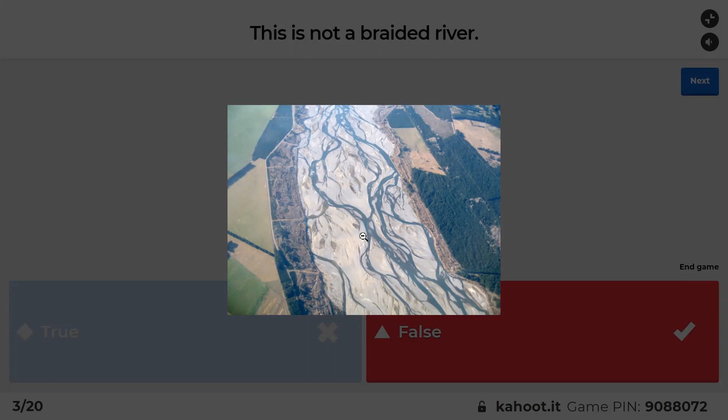This is not a braided river. So do you know the braided river? You see so many parts of the river deviating from the main stream, so it's called a braided river. It can be maybe 10% meandering, but in the previous question, the best answer should be A. So if you have a question, just stop me.

Interesting, be careful about the 'not'. The value of kinematic viscosity for water - is it 10 to -7, -5, -3, or -6?

Do you have any question? Yeah, you see the correct answer here.

So double points - does vegetation not increase erosion? Maybe it slows the flow and resists sediment, so it makes sense.

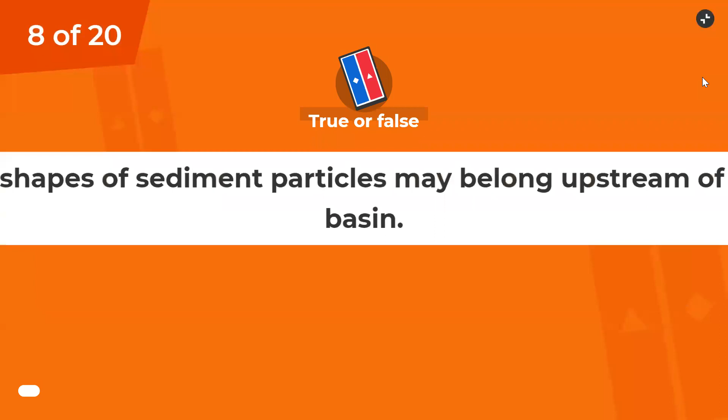If you have any question, just ask me. True or false, double point. So we have some shapes of sediments here - do they belong to upstream or downstream? Imagine we have a river reach.

It may be for upstream or maybe for downstream of a river basin or river reach. Look at the corners of the sediment particles, or the shape of it.

Good, yeah, because you can see the sediment particle has some corners - you can see they don't face erosion. So they should be from upstream of a river reach, because as they move down the river, they collide with each other and erode, and the shape will become completely circular or a sphere.

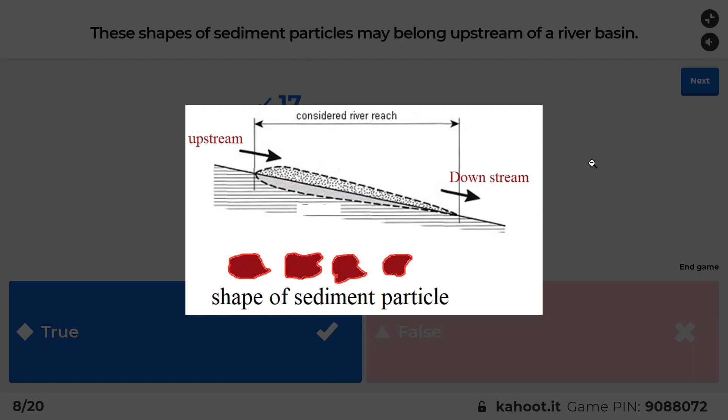No, we need it during the course today. Why? Yeah, it's so easy, but R is A over P. Yeah, and Y relative to B is so small, so it should be Y.

Yeah, it's not working here. Okay, I will explain this.

The meaning of aggradation - Ninja? Aggradation.

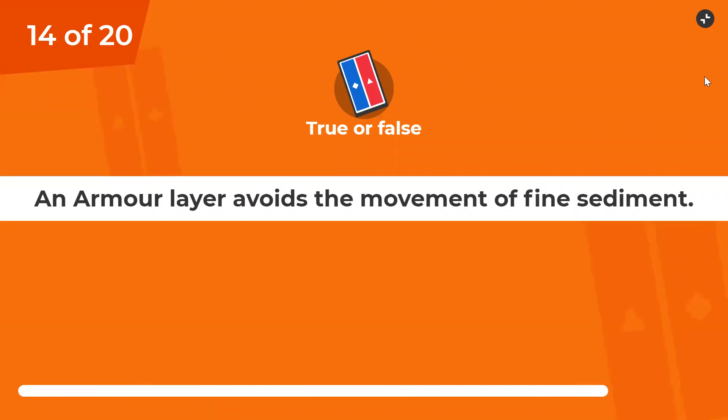Armor layer, you have it in previous lecture. Good. Yes, armor layer, there is like armor which defends from the fine sediments and avoids erosion. I will show you more pictures.

Yes, there is an armor layer in this picture. For example, here you can see there are so many coarse material or coarse gravel, and also here. So these avoid erosion of fine material behind them.

Where is Kamal? Are you going?

True or false, double point. Rouse number. You can anticipate both bed load and wash load with the Rouse number. Yes, if you remember the graph, you can estimate both.

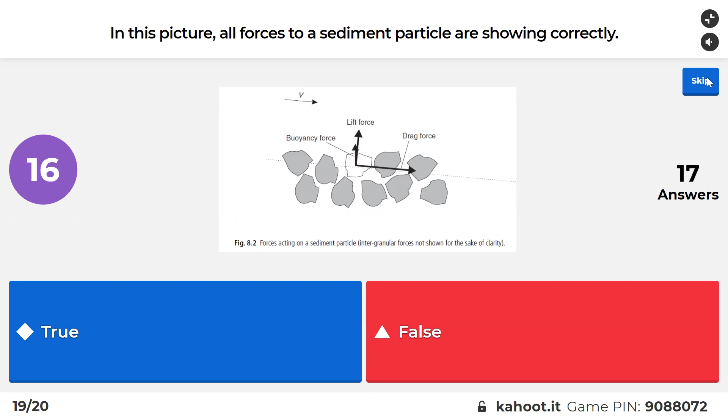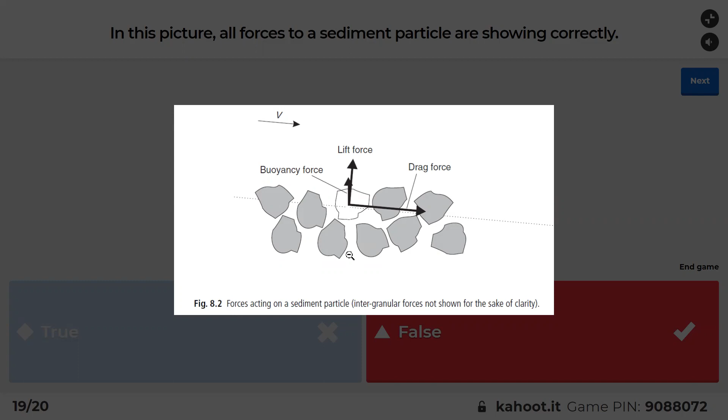So it's false, you cannot see all forces in this picture. Which force is missing? Yeah, the weight of a particle, gravity. So we have another force downward here, which is so important.

Last question. You are so near to each other. So it's the Shields parameter, and tau star C is the critical value. Yeah, 13 is good.

So when your shear stress is more than critical, you have movement. If not, you don't have movement.

Yeah. It's not so bad, yeah, but everyone is near to each other. Good. Who is Yi Yang? Yeah, and Saroj? Yeah, and Sujit. You have to be better.

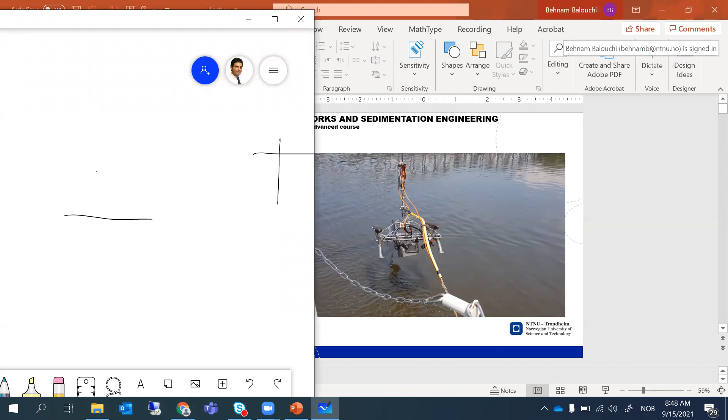Yeah, we have a problem here. So I need to restart this, but it is better to do it later. Yeah, it's not working.

Okay, let's go through this and then I will explain it later for you. I want to tell you a story of sediment transport, both bed load and suspended load, but the tablet is not working and I have to restart it. So I'll go through the slides and then come back and give you some information.

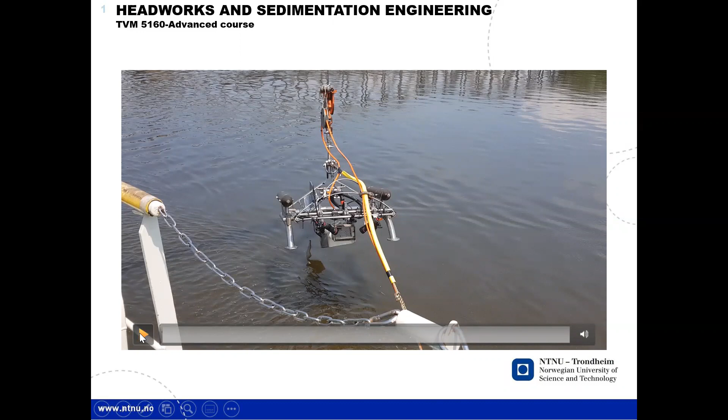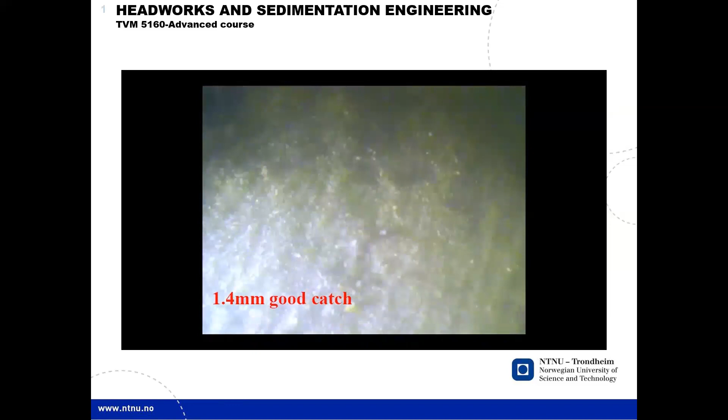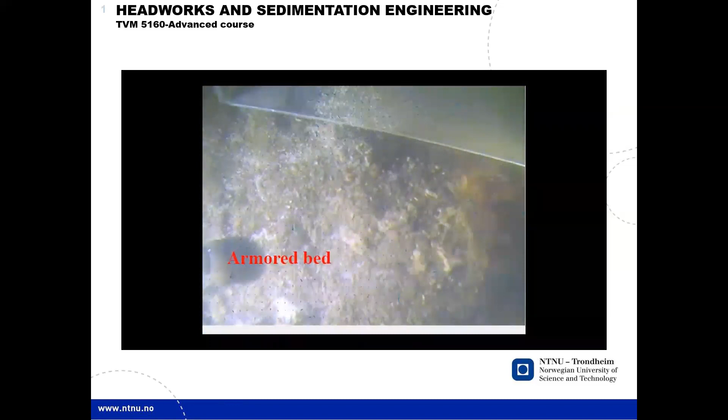So here you can see bed sampling. This is a sample and you can see how to trap the sediment particles there. Sometimes it's good for sampling, sometimes not, and you can see the movement of sediments. So here it's good catching the sediment, we have debris or obstacles in front of the sampler. And here you see an armor bed, so we don't have any sediments going to the sampler.

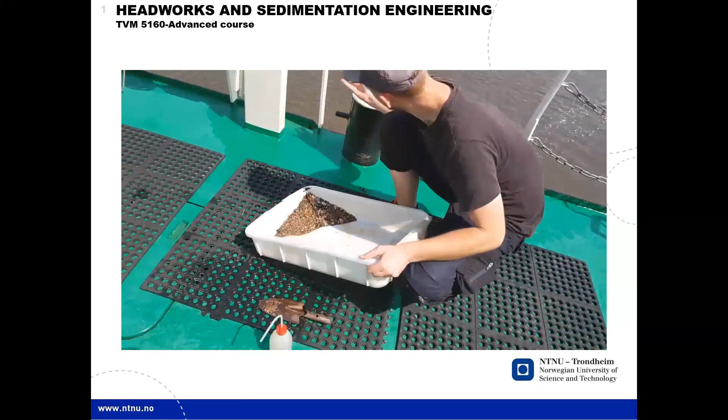You can see a scour, and while you see the scouring, look at the movement of sediments. And here is the bed sample that you can see, these are uniform sediments.

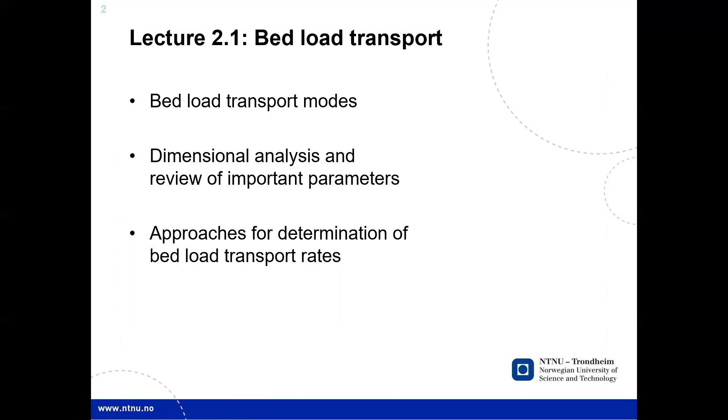So we are going through bed load transport modes, dimensional analysis, and review of important parameters and approach for determination of bed load transport rate.

So let's start with the way of moving sediment. The term bed load defines all particles which are transported along the riverbed in a rolling, a sliding, and saltating manner. You can see here rolling, sliding, it just goes straight, saltating or jumping. I will explain them after the rest because I need the tablet.

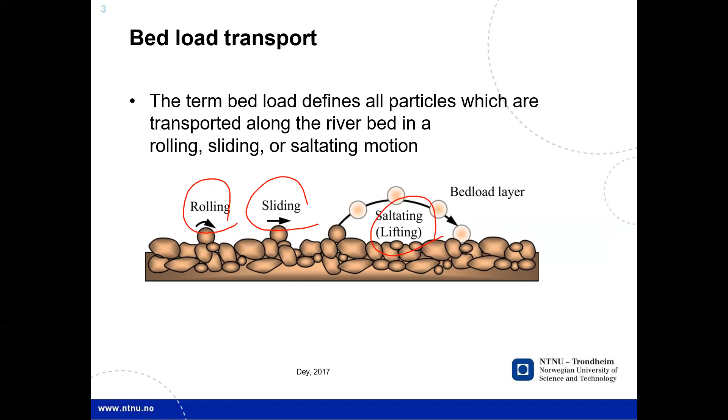So according to this definition or assumption, each researcher chose one assumption. One of them chose that the sediment moves based on rolling. One of them chose that sediment moves based on sliding or saltating. And then they provided some equations and some research. But the main point, like previous equations or previous parameters you want to consider, you need a dimensional analysis.

You may remember the dimensional analysis methods such as the Buckingham Pi theorem. You may remember that.

Then we want to evaluate the sediment transport. We define it as GS, and you can see the dimension or unit of that, kilogram per second. And if you want to consider it, for example, per 1 meter, it should be kilogram per meter multiplied by second.

So it depends on some parameters that you can see here. For example, the parameters of fluid properties, it's the fluid density and kinematic viscosity. For the sediment properties, it's density of sediment, rho S means sediment, D is grain diameter or sediment particle diameter.

Channel, so we use the water depth of channel and the shear velocity of the channel. And kinematic parameter, G, which is 9.8, the gravitational acceleration. In various references, you can see we have 8 parameters, in some 7. So you know from the dimensional methods that we can convert these parameters to each other. So here we consider 8 parameters.

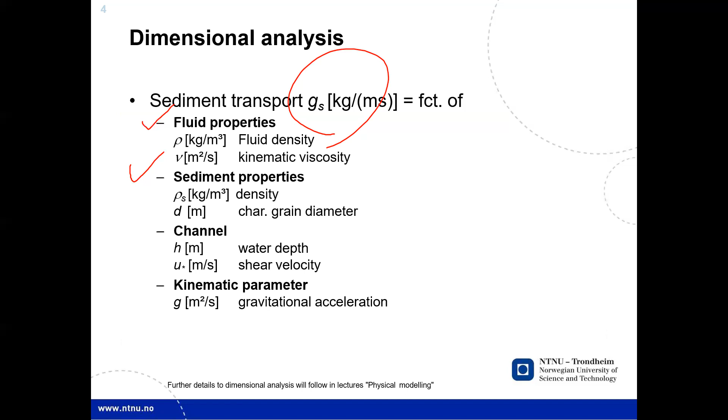And you know from Buckingham Pi theorem that we have 3 main dimensions, such as length, mass, and time. So meter, kilogram, and second. And we have 8 parameters. So our dimensionless parameters should be 8 minus 3, which gives 5 parameters. Okay, if you have any question, ask me.

The other one is Shields number, which you have seen in a previous section. It's tau 0 over rho S minus rho multiplied by G and D. And the other one is the density term, so rho prime - it's important that rho prime is dimensionless. So it's rho S minus rho divided by rho. And the other one is relative submergence, the water depth over D.

And if I want to remind you about laminar flow versus turbulent flow - you can see it's laminar flow and the streamlines are straight, then we increase the velocity or increase the discharge, you can see turbulence in the streamlines, and it's not a straight line. So this is turbulent flow, and it occurs mostly at high velocity and high discharge.

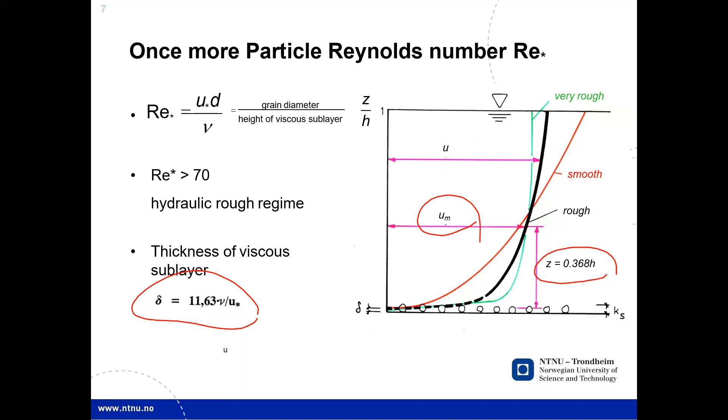Particle Reynolds number can be combined with Shields stress, resulting in a new parameter. Some researchers developed or introduced a new parameter, mostly for rough regimes, called D star, named the sedimentological grain diameter.

The definition is this equation: Reynolds star to the power 2, over the Shields parameter, and the power is 1/3. If you insert this value, you have this parameter.

After introducing D star, they introduced some figures, and by those figures you can determine which regime and which flow kind you have. It's another representation of the Shields diagram.

For a predefined material with given D and density, D star depends only on the kinematic viscosity, which itself depends on temperature. So somehow it depends on temperature. But the influence of viscosity is generally negligible for Reynolds star more than 70. If you remember the graph, in the turbulence regime it's not important.

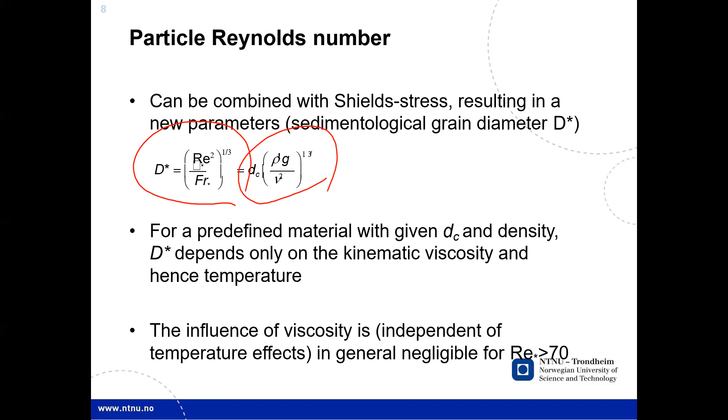Further parameters you should know: the shear stress is gamma R S, or if you insert gamma, you have rho g h S. This is for a wide channel.

Maybe that's your question, Mona - it's in the Kahoot test. R for a wide rectangular river is Y.

Shear velocity is given by this equation, tau 0 over rho, and critical Shields stress is this important equation, which we mostly compute as this value, 0.047.

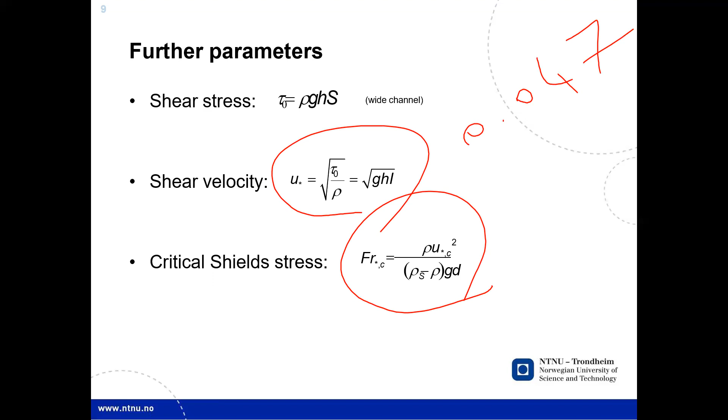Other important parameters we face in this course: the absolute bed shear stress, tau 0, meaning gamma R S, and tau star, which is the equation I showed you: tau 0 over (rho S minus rho) multiplied by G D.

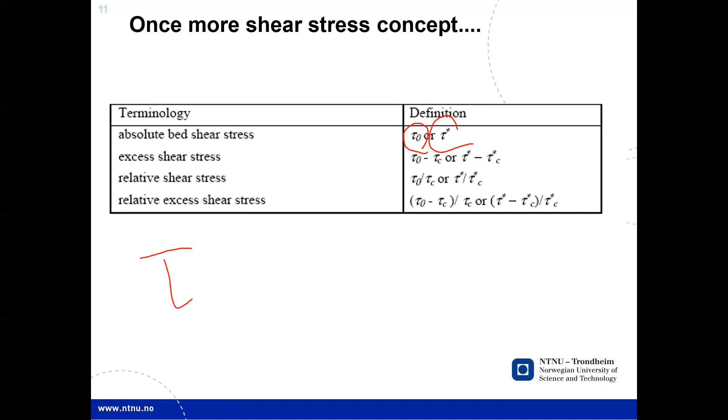Remember this question from the Kahoot test - if we have this condition, what happens? Kamal, are you here? So if we have this condition, what happens - do we have movement or not?

Everyone think about it. Our shear stress is less than the critical one, so we don't have any movement because the critical one is more. The difference, tau 0 minus tau c, you can see here - it's called excess shear stress, and I think it's an easy definition you can understand.

Relative shear stress is a way to make shear stress dimensionless - we divide tau 0 by tau c, or the other parameters. Relative excess shear stress is similar, and you can see the equations here. In your examples or other problems, if they ask for excess shear stress, you compute this parameter; if they ask for relative excess shear stress, you compute this other one.

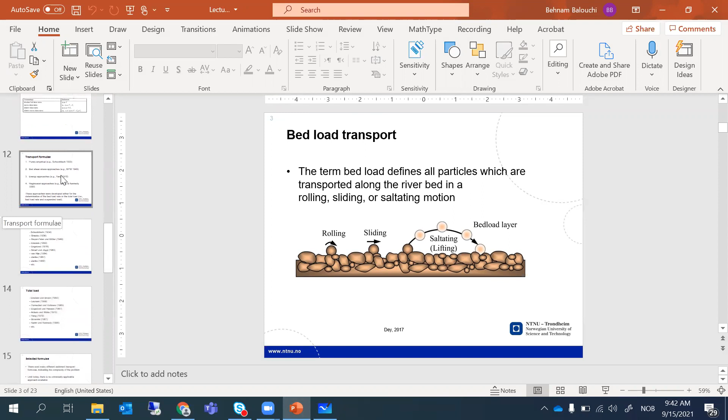So do you have any questions? Okay, just go to the PowerPoint. I think we are here.

So as I said, we have some methods for transport of sediment, or transport formulas. One of them is based on empirical methods, for example Schoklitsch, 1933. The other is related to the bed shear stress approach. Another uses an energy approach, for example by writing the energy equation in differential form, they extract or find an equation for computing the sediment load. Yang is also famous - he has a really good book that you can study. And some of them use regression approaches, as I told you, using experimental data and dimensionless analysis, they extract an equation.

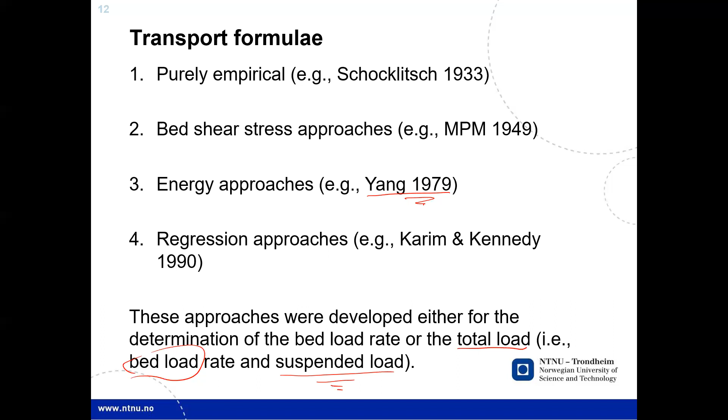These approaches were developed either for the determination of the bed load rate or the total load. It's important to know that total load is the bed load plus suspended load. Some equations estimate total load, some estimate bed load, and some estimate suspended load, so you should be careful about using them. If they ask you for the total load, use the equation that gives total load, or if you use separate equations, just add bed load to suspended load.

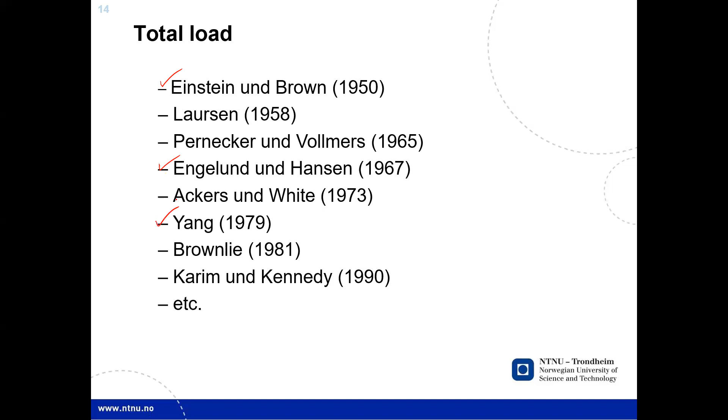There exist many different sediment transport formulas, indicating the complexity of the problem, and as I said, until today there is no universally applicable approach for them. But as an example, we are going to explain briefly the Shields method and Meyer-Peter and Müller.

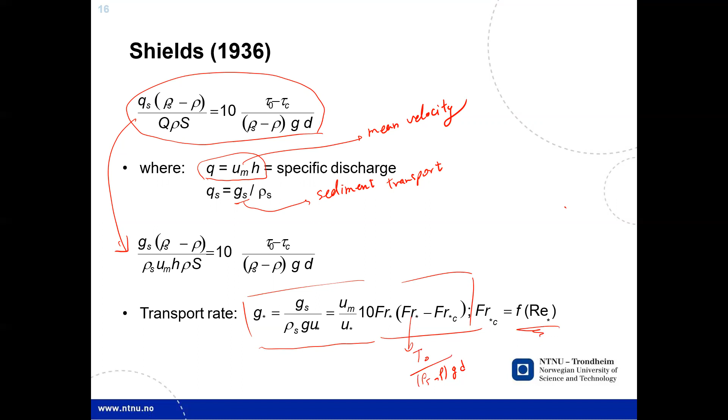If you remember, this is the Shields parameter—I introduced these parameters before. You know that the Shields number is related to the particle Reynolds number. So you have some examples to solve; you just need to use this equation and, for example, find tau zero using gamma, R, S, put the data in it, and solve it. I think it's not difficult, but next session you can ask about this if you have any problem.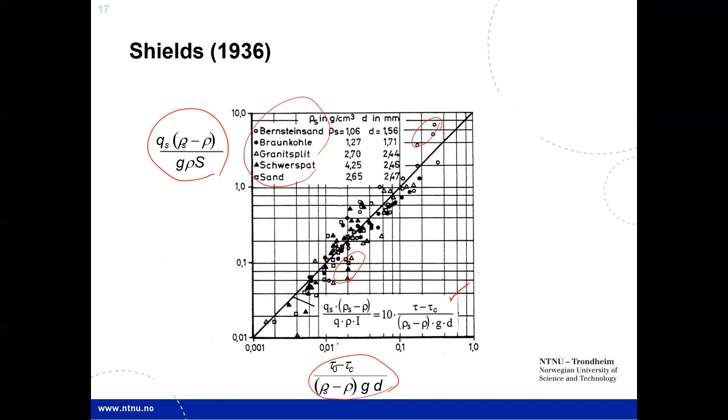Shields stress, that you know. Critical Shields stress, that usually we consider. For example, Einstein has another value close to that, but this is the most important value for the critical Shields stress—this is tau C, and this is the formula for that.

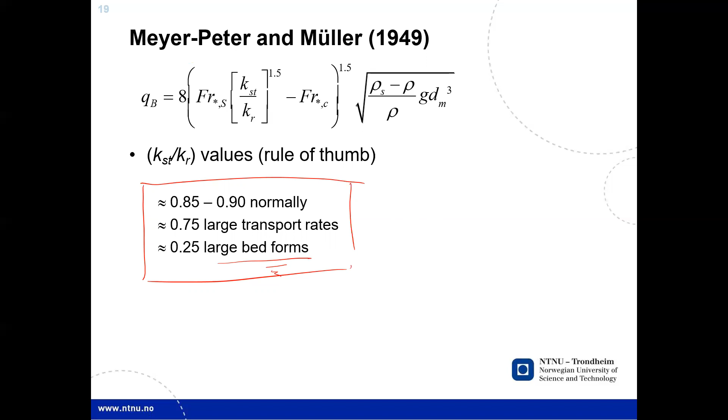So you should make a graph—you remember, you have a graph of sediment, where this is 100% and this is D. You have these values, the accumulation probability. For example, here is 60%, this is P. For example, here you have D1 and this is P1. If you remember the grain size distribution graphs, you can see this—I think you have it in the first lectures.

You just need to remember, I think you have it in previous lectures, how to distinguish between uniform sediment and non-uniform sediment. So that graph is something like this.

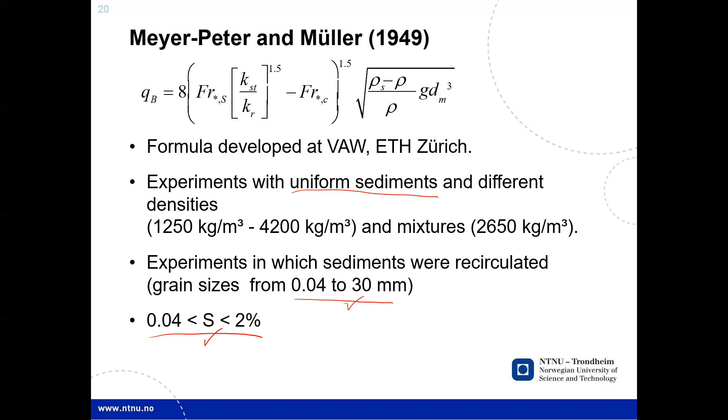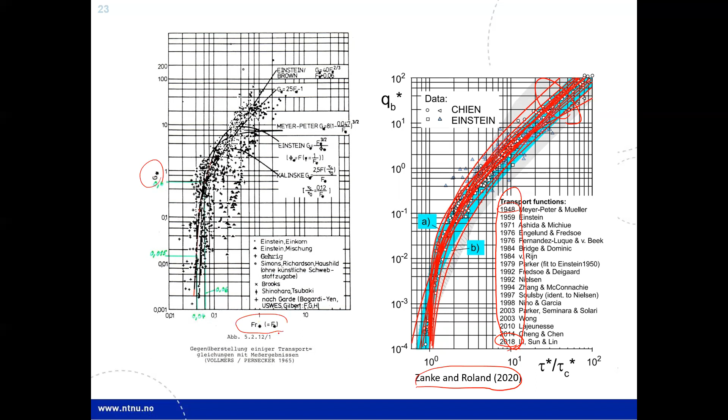Here you can also compute G star based on the Shields number, for various equations or methods like Meyer-Peter. You can see each one is different; for example, this is as this curve, this is as this curve. If you want to use this curve, it's just a graphical method, and it's not always useful, but it's good to see it.

For example, you find the Shields number as this value, 0.04. It's like a Moody diagram that you use to compute F, the friction factor. Then, for example, use the Meyer-Peter curve coming here, and then you find this, for example.

You remember the Moody diagram? You have a diagram like this. I think this is F, this is for various epsilon D, and this is for Reynolds number, then you have for various epsilon D. It's exactly like that, compute it.

But it's good to see each method is different from another method. So, as remarks, as I told you some of them: determination of sediment transport rate is one of the most challenging topics in hydraulic and environmental engineering. There exist many formulas, but a general unifying formula is not yet available. More detailed theoretical work, considering different scales such as grain scale to reach scales, is on its way. Still, so many researchers develop new equations for particular cases.

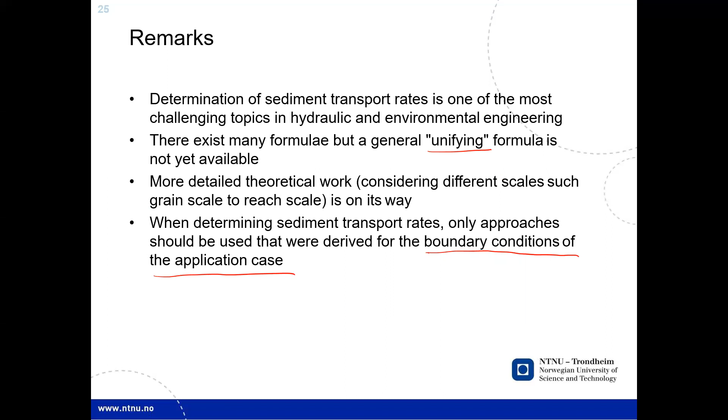It is recommended to use not only one, but more approaches to determine the expected range of transport rate. As I said, you should use, for example, 4 similar methods or equations, and then choose the best one based on your experience and your case.

Sometimes it is possible to gain information from site investigation. For example, sometimes you sample bed load and see the grain size, grain diameter, and monitor the sedimentation in reservoirs, and they can help you decide which one is better. Additional bed load and suspended load measurements are also helpful. Such information can be used to choose the most appropriate approach.

The other thing you should consider is sediment budget. We have some equations where we say, okay, this equation is good for computing bed load, and this equation is good for computing suspended load, but these are your expenses. For example, you want to buy a laptop, and the laptop price is, for example, 40,000 krona. So if you have that money, you can buy it.

It's like here: if you have a source of sediment, then your values are fine. For example, if you have a landslide, if you have fine material of sediment, I mean a source of sediment. For example, you calculate the total bed load as one value, for example A. Then if you have this source of sediment, this source of erosion in your watershed, this value is correct. You got it?

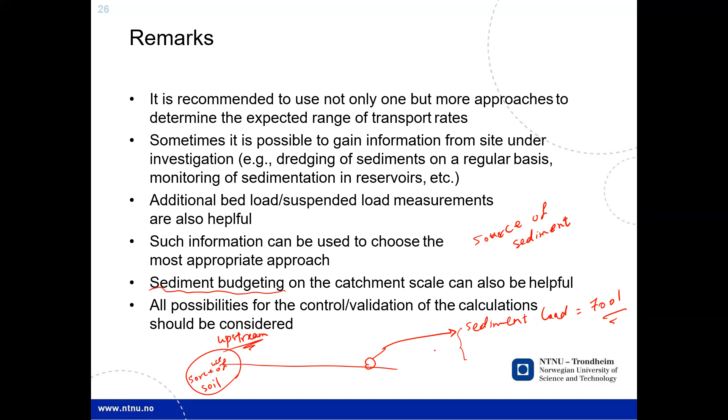If you have a sediment source coming from upstream, so this is upstream, you compute sediment load here as this value. But the constraint is that you have to have this source of soil or sediment here. You want to buy a laptop here, but you have to have that money in your pocket to buy it. You got it now?

So ask me a question if you need more explanation.

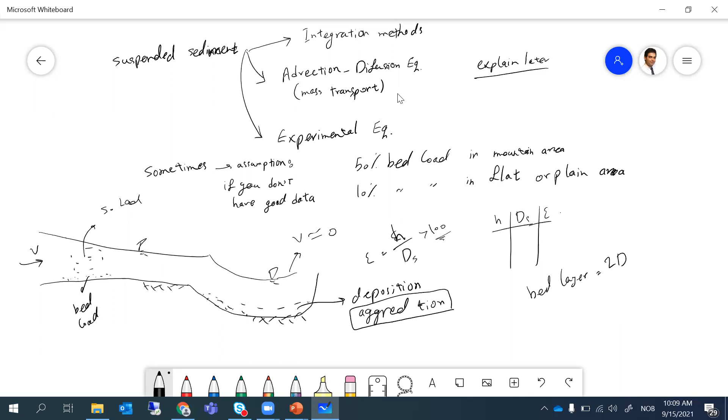So what is this value, or what is the quantity of these? This is coming from bed load and suspended load. You got it? Yes. The name is aggradation, deposition, or sedimentation, but the quantity is the summation of bed load and suspended load.

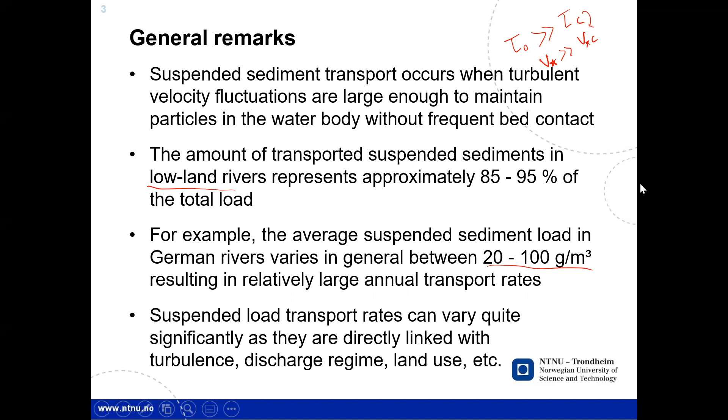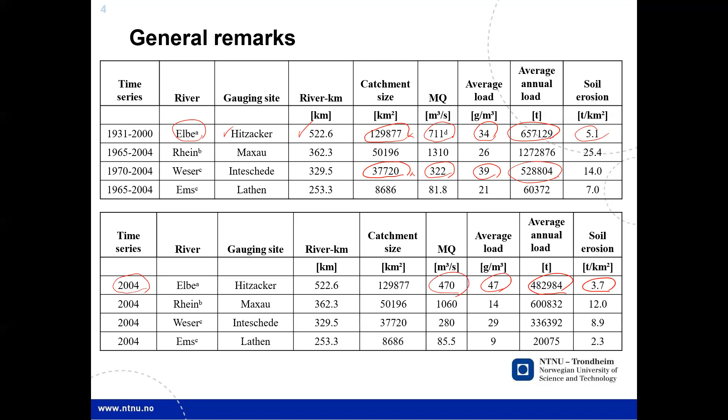So here at the same time, you have different discharge, different load, and different soil erosion. So it is related to events. For example, in that specific year you have a large flood or heavy floods that makes more sediments or more erosion compared to another year.

So there are some examples of maximum transport load. You can see 15.5 here for the Saalach River in Austria. This river is the Tiber River in Italy, I worked there, it's really amazing and large. And this is a famous river in China. You can see the values.

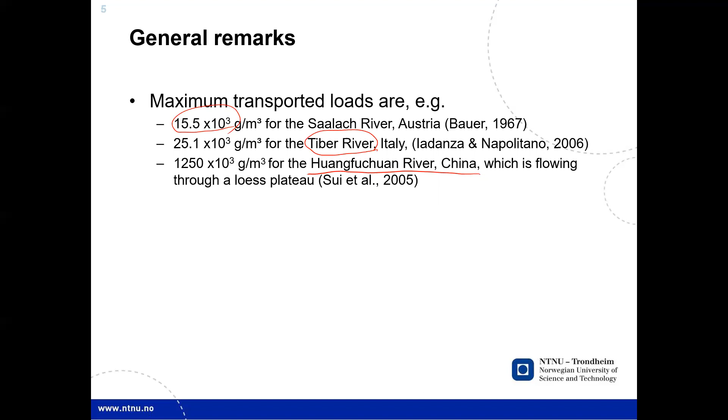So suspended sediments are much more influenced by the cycle between erosion and sedimentation than bed load. For example, in zones with low turbulence, like side arms, oxbows, harbors, etc., suspended sediment can be deposited, resulting in bed aggradation and loss of retention area.

It's an oxbow, and after some years, when the river develops, it's going to be, for example, straight, and then diminished after some years. I think here you can see this. So after so many years, it will be like this. You can see here, this area separates from this.

The next remark we can get from here is the deposition of suspended sediment. It's also often a problem, as pollutants are often directly coupled with suspended sediments. For example, you have a pollutant in the water, and the problem for us to compute the suspended sediment is that pollutants change the density of water or change other parameters.

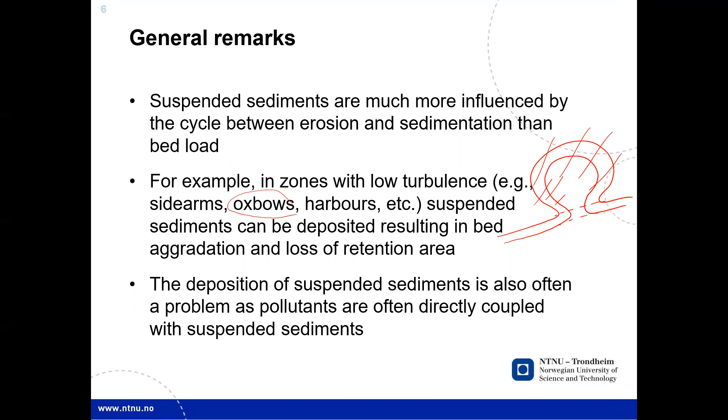As a case study, we have this famous lake in Bavaria, Germany, Chiemsee, which has significant deposition of sediments. Between 1926 and 2000, the annual volumetric transport rates of suspended sediment varied between 1,000 to 450,000 cubic meters. However, within single events, up to 185,000 cubic meters of sediment can be transported within the lake.

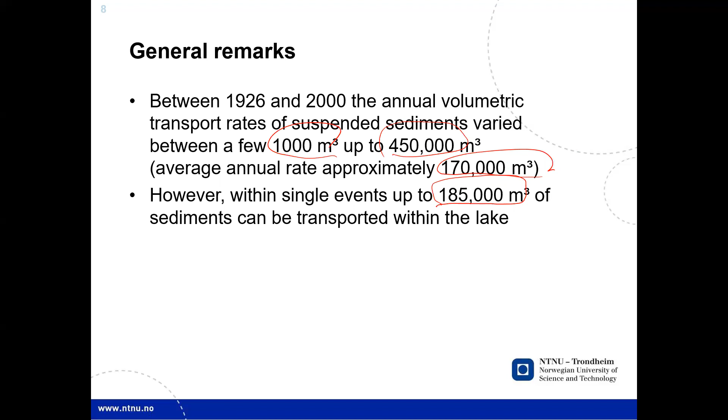So they should use some methods to conserve the watershed, for example, build or construct some small dams to catch the sediments upstream and not let it come into the lake. But another benefit is that because of the sedimentation in the lake, the soil is so strong and useful for agricultural purposes, so they can extract it and use it, and of course sell it to the farmers.

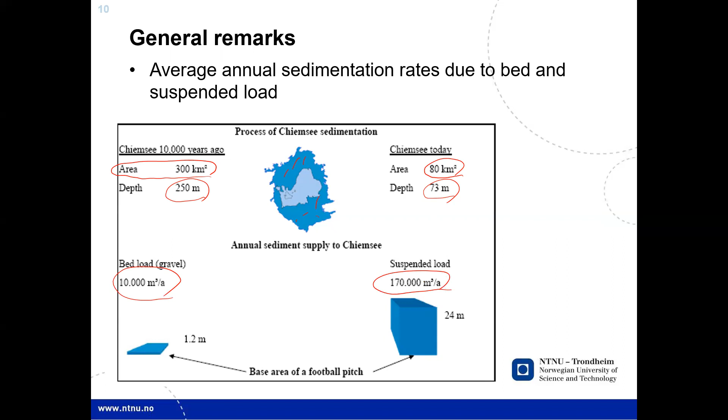So this is an example, you can see. I think this area was just added after the sedimentation, and it's very good for farming. You can see they have some farms here, and these are new developed areas here.

The investigation showed that approximately 80% of the suspended sediment originates from an upstream area, which is geologically mainly composed of greywacke, a sort of unstable sandstone. It's a specific sandstone, you can see it here. It's really unstable, and after colliding with each other, they break down into so many fine parts.

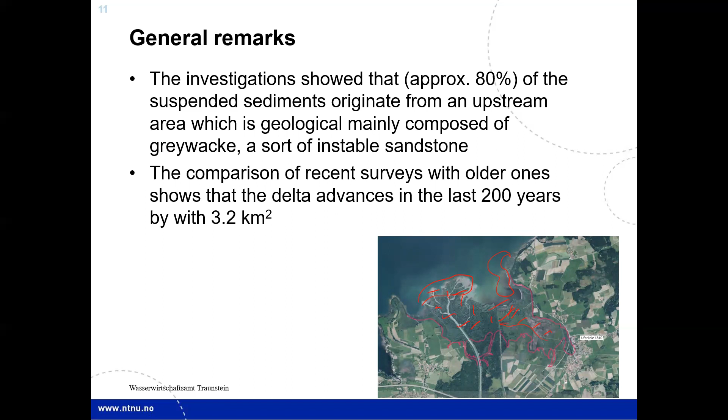The comparison of recent surveys with older ones shows that the delta advanced in the last 200 years by 3.2 square kilometers.

Okay, how to estimate suspended sediment transport? We have some equations, but how did they start to develop these equations? I explained a little to you in the previous lecture, if you remember that. I can also explain it again.

So generally the mass transport is divided into two parts: advection and diffusion. Advection is like the effect of force, so based on the force, it causes the sediment movement, and gravity is the main force. And you know diffusion, diffusion is the change in concentration.

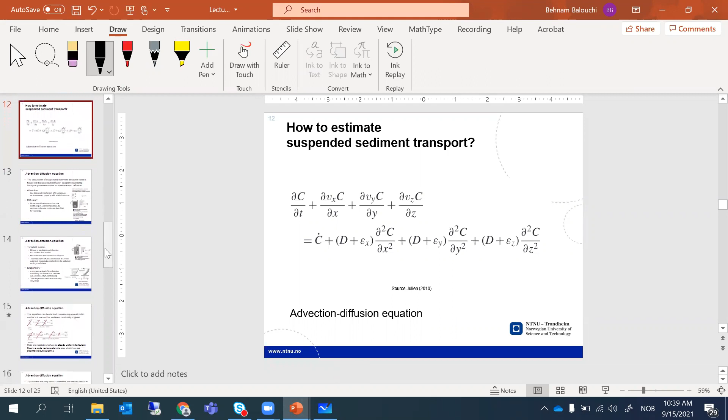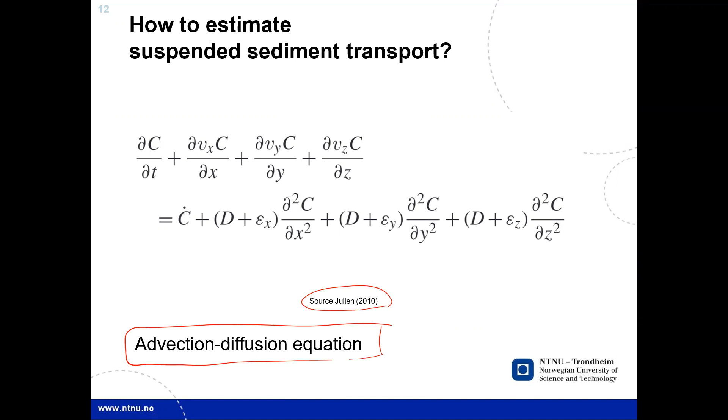Okay, we are here. So this is a general equation of suspended sediment transportation, or advection diffusion equation. The source is this. You can go through this paper to know more details, or read the papers. But I try to introduce some parts here.

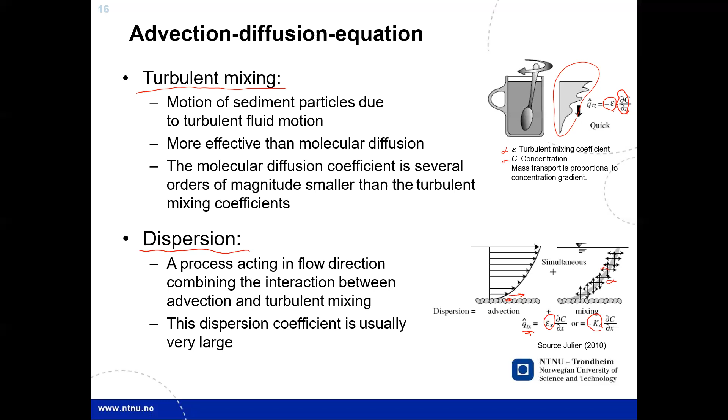If you have... I'll explain a little about dispersion. You can see we have advection here, where the particle goes straight, but simultaneously we have the mixing, and this is the effect of dispersion. The value is computed as this is the advection, and this is the dispersion coefficient. A process acting in flow direction combining the interaction between advection and turbulent mixing, this dispersion coefficient is usually very large.

So this is our advection diffusion equation, but we consider an assumption: we have a steady uniform turbulent flow.

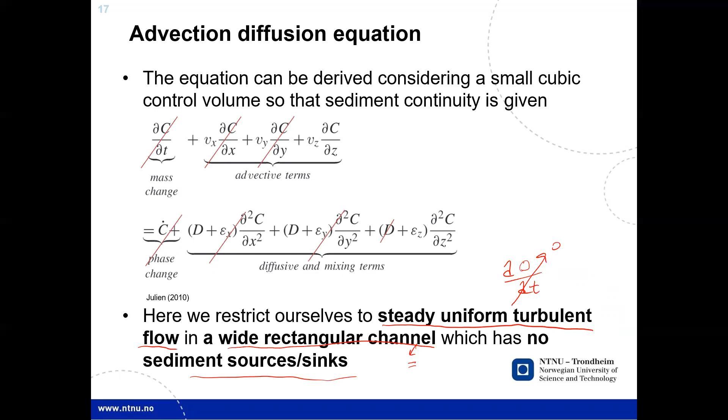So each derivative to t, you consider it at 0, and wide rectangular channel, so you have just Z, has no sediment source and sinks. This is an assumption or limitation that we add to our equation to make it more simple. So in this way, we ignore these terms, and then we have this final equation. This means we only have to consider the vertical direction and can neglect the molecular diffusion coefficient D.

So as you know, the left hand side here represents the advective term, and the right hand side is turbulent. So this is turbulent, this is advection. The advective term results from the settling of particles due to the density difference between the particles and the fluid.

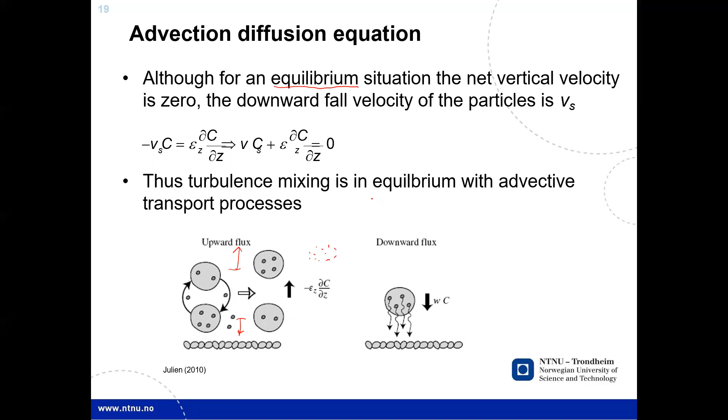So then if you integrate from both sides, you have this equation. So you remember that I talked about equilibrium condition. I told you that they collide with each other, and some of them go up and some of them go down. So it's an equilibrium condition. The summation or total of this is you have some constant sediment as a suspended load on the water column. So the turbulent mixing is in equilibrium with advective transport process.

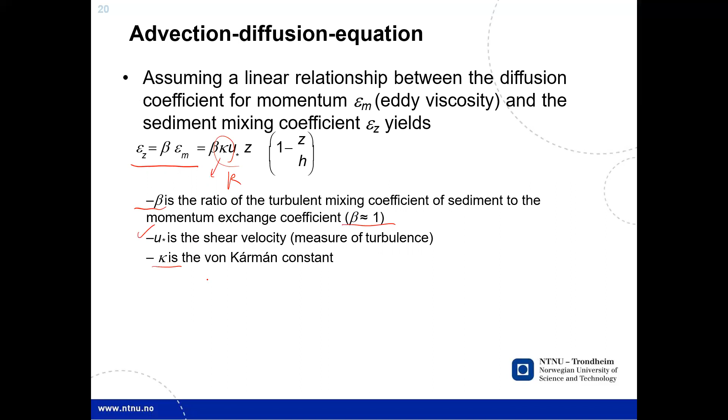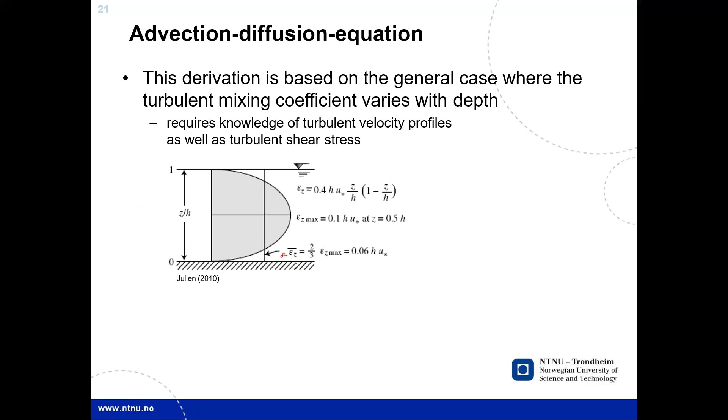So the derivation is based on the general case where the turbulent mixing coefficient varies with depth. You can see values of epsilon z according to the various depth. And so von Karman considered this equation, and if you insert this assumption into the equation that we had, coming from the advection equation, results in this final equation, which you usually use to compute the concentration at different locations.

So you know Z is Rouse number, you should consider this, this is important. And z is a vertical coordinate, and H is the water depth. You know the Rouse or Rouse number, sometimes the symbol changes in different references, sometimes they show it as R0. Ca is the reference sediment concentration at a reference elevation above the bed, and A is often determined at this value.

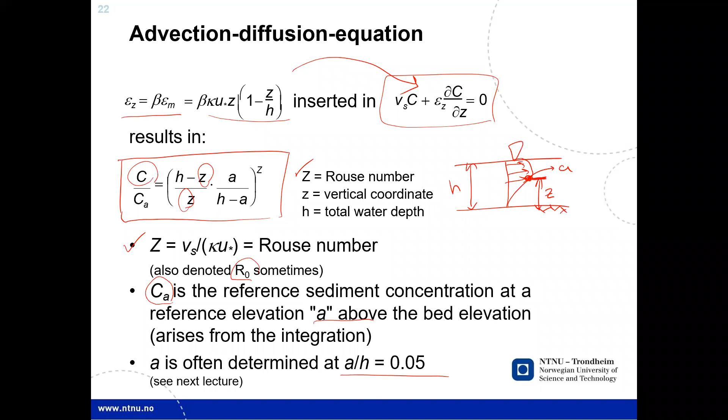So for example, you have this concentration profile. This is H, and you want to compute here, for example CA or C. Usually you have CA and you want to compute C at this location, this is point A. So CA is the reference sediment concentration above point A. You have one example of this that Muli solved, and you can see so many examples of this in the books and papers.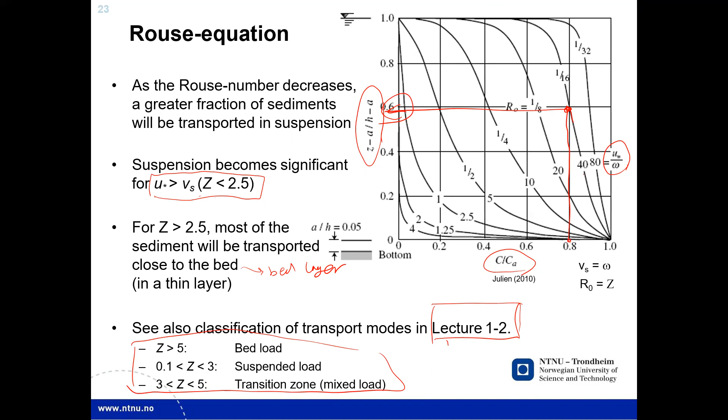So Rouse number, as we said, it's a method for estimating the movement of sediment: bed load, suspended load, or the transition zone. Yes, this is the dimensionless grain diameter, and this is the tau star. For example, you compute that your point comes here, and you know that you have dunes or ripples, and it is bed load or it is suspended. These are the general methods for computing the various shapes of sediment movement.

And you know what dunes and ripples are? We have some bed forms like these, you can see near the beaches, for example, some bed forms like these. Did you see that?

So it's named as ripples or dunes. When the height is more than 10 centimeters, it should be dunes. So the big one is dunes, and the smaller one is called ripple. They have so many details, and they're dependent on the regime, the flow regime - whether it's subcritical, critical - and so many details that you should go through. But it's important to at least know what is ripple and dunes, because it changes things.

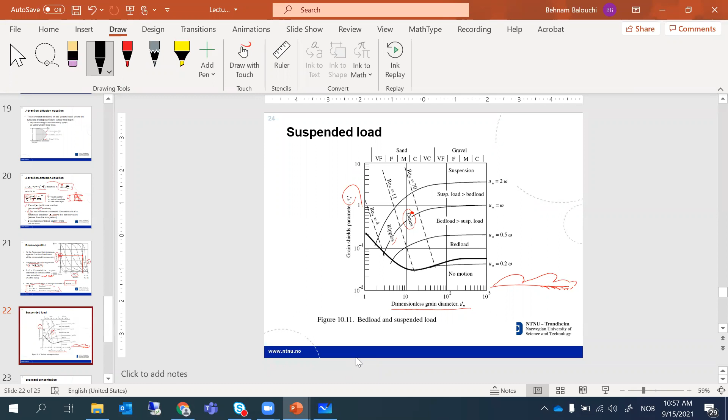Yes, the other definition is the weight concentration. We use weight. You don't have any written exam, but in the project, be careful that they ask you to find the bed load in mass or in volume. And the concentration in parts per million, ppm - you have these, and this is another definition that you can find in this paper.

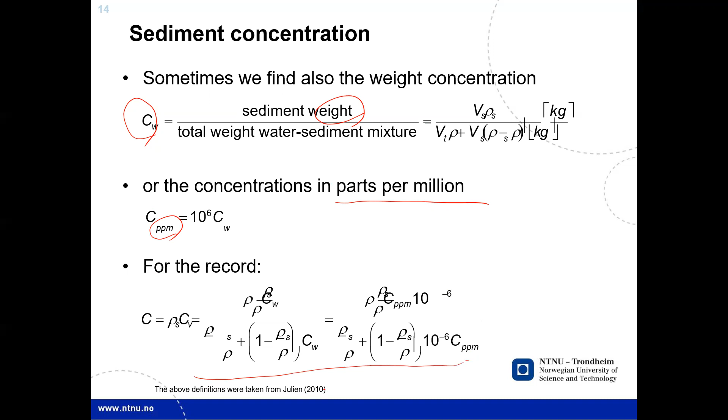Knowing the concentration profile, the unit suspended sediment discharge can be computed from the depth-integrated advective flux of sediment. So do you remember this?

No? Yeah, this is the one that I told you here. Where is it? This one? No. I think this one - this is this equation. It's the same. So I'll pass it, I explained it here.

And the corresponding total sediment load is obtained from integration of the unit suspended sediment discharge over the entire width of the channel. So this slide is exactly the explanation that I gave you on the blackboard. So do you have any questions?

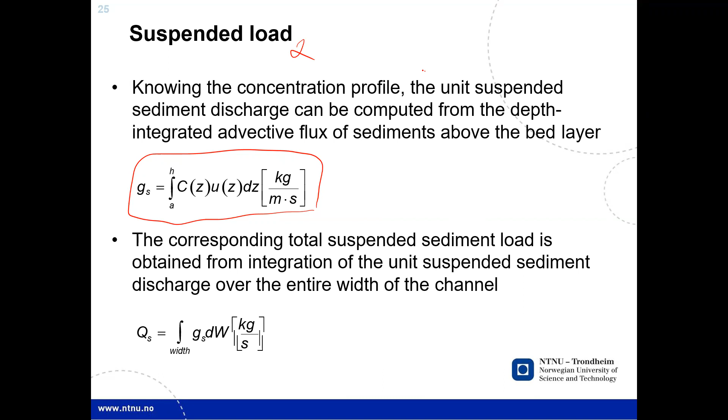So it's a large story with so many equations that you don't need to memorize them. You just need general things, like knowing it's useful in turbulent flow, and when you want to use it in the projects, you can open your book or open the equation. Sometimes, in the example, we give you the equation, and then you can easily compute the parameters and add them to the final equation.

So the last PowerPoint, which has more details for you if you want to study, talks about the settling velocity, which I think you have in previous lectures or maybe in future lectures, but it should be before our lecture.

And you know that we have a sediment and we have forces. If the effective force is more than the resistant force, it's going down, and if both are the same, it stays in the column of water. And the parameters which affect that are here.

And then you have, you know, this is the effective forces and resistant forces. And the important thing here is CD - just for your further information - it depends on the shape of the sediment particle.

For example, if you have this particle and this particle, the settling velocity is different. Imagine that you want to drop two balls with the same weight, but with different shapes - so the resistance coming down is different. And you can read other things for your further information if you want.

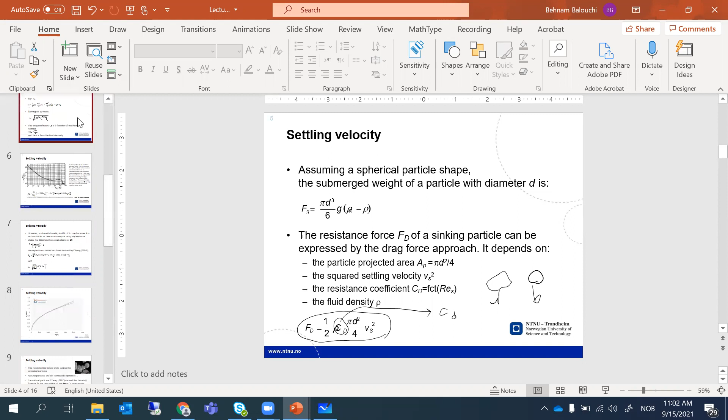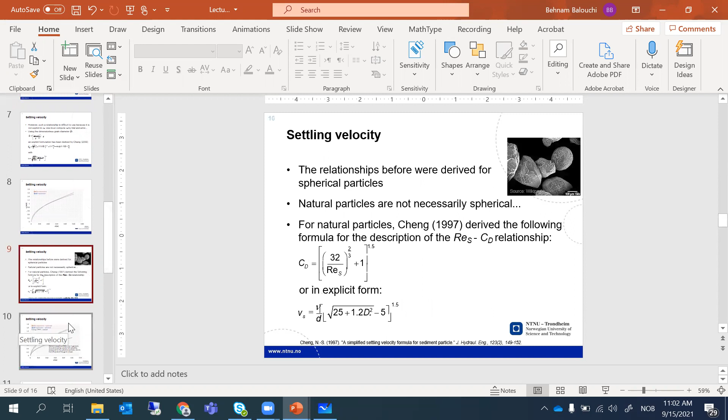Yes, this is the thing that I told you - the forces are equal. I can't see anything special here.

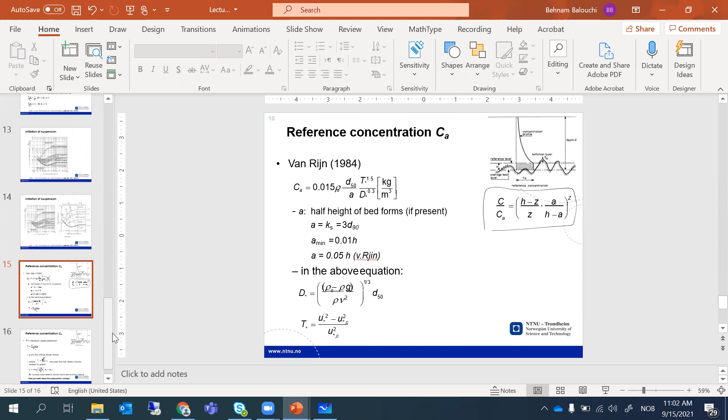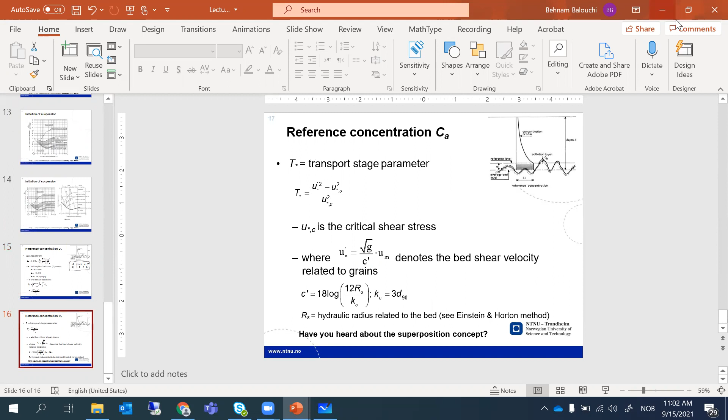Yes, this is more information about these equations. If you need more details, you can read it later. And also you can see so many books, Young and other books, to have more information about it.

So if you have any questions, you can send me an email or ask now. And yes, Muller is waiting for you to solve more examples.